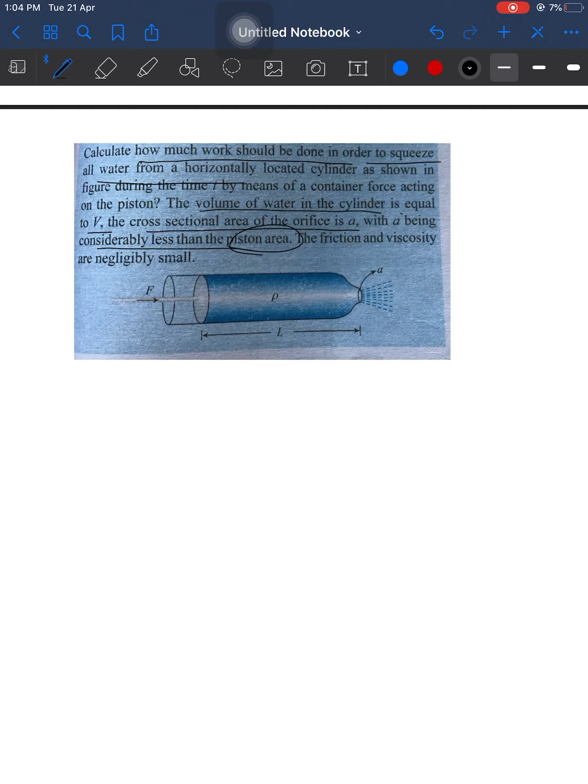First, volume of the water of the cylinder is equal to V. Cross sectional area of the orifice is a, with a being considerably less than the piston area, so area is small. Friction and viscosity are negligibly small.

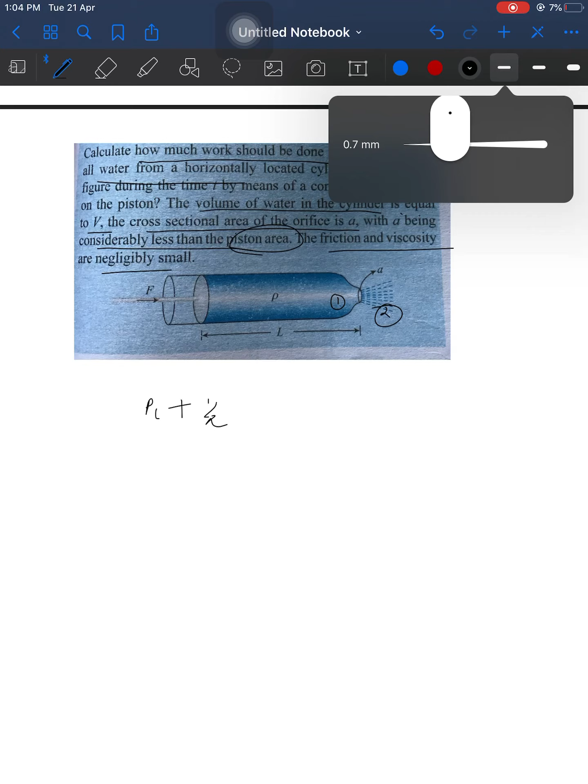Let's apply Bernoulli's equation between points 1 and 2: P1 plus half rho V1 square plus rho GH. If you see the tube is horizontal, then the H component becomes 0, because if there is an inclination, height changes are there and you have to consider H. If the object is horizontal, you don't need to consider height.

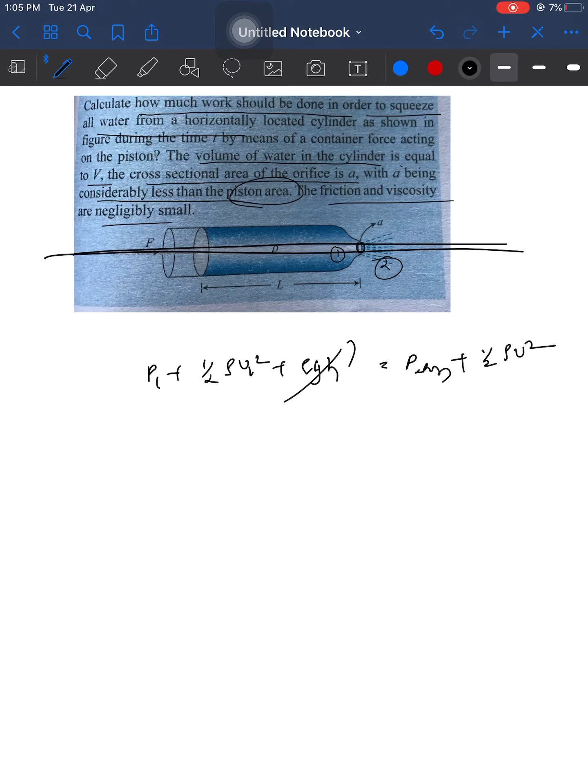P1 is equal to P2. P2 is equal to P atmosphere plus half rho V square plus rho GH, which goes to 0. Initially the orifice is small - I discussed this in an earlier video - if the orifice is small, the velocity becomes 0 inside the tube, so V is equal to 0.

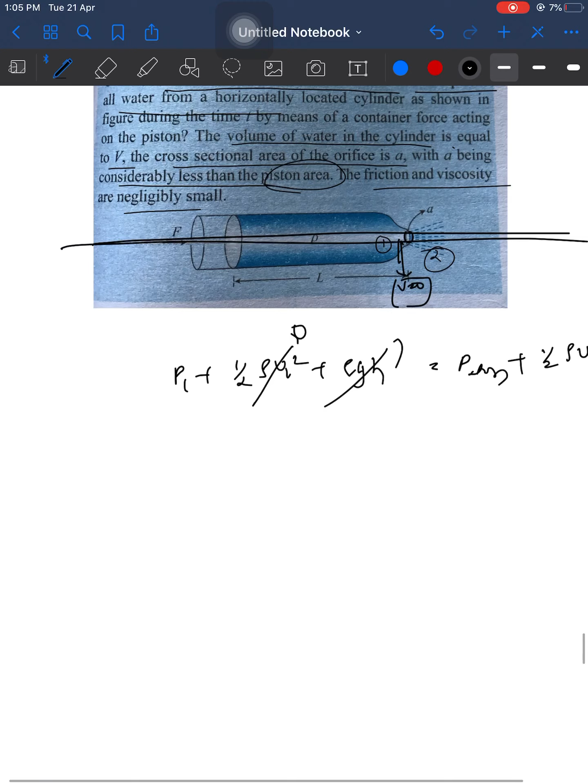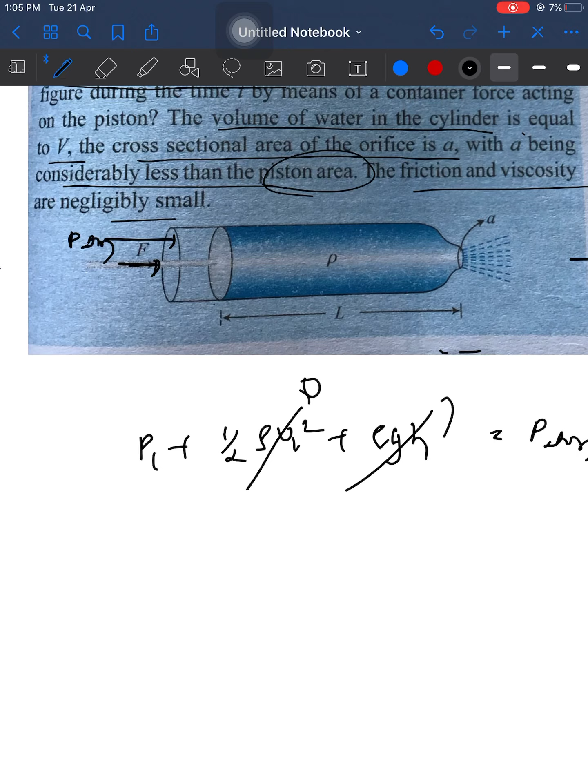How to get P1? To get P1, we consider what forces are acting here: atmospheric pressure plus this applied force. How do we convert force to pressure?

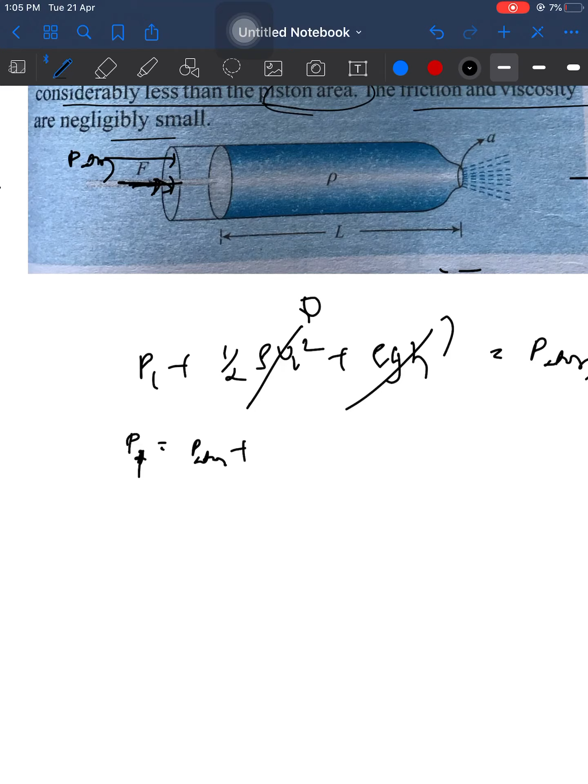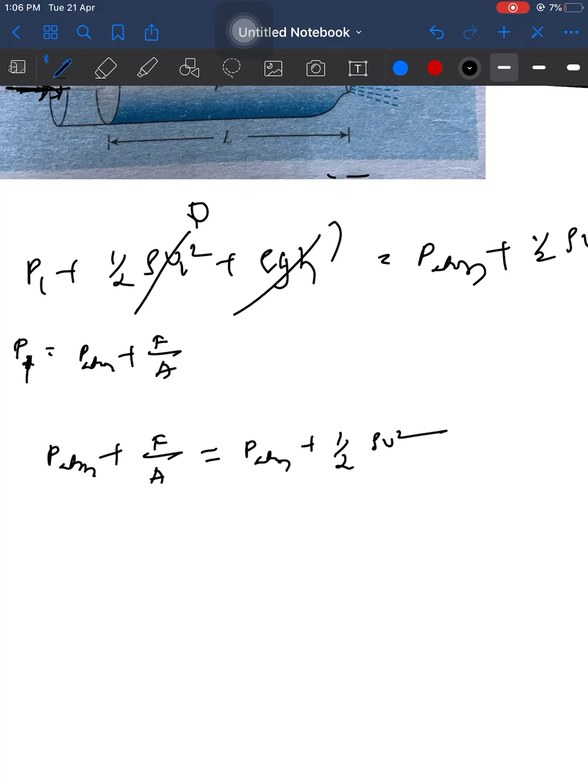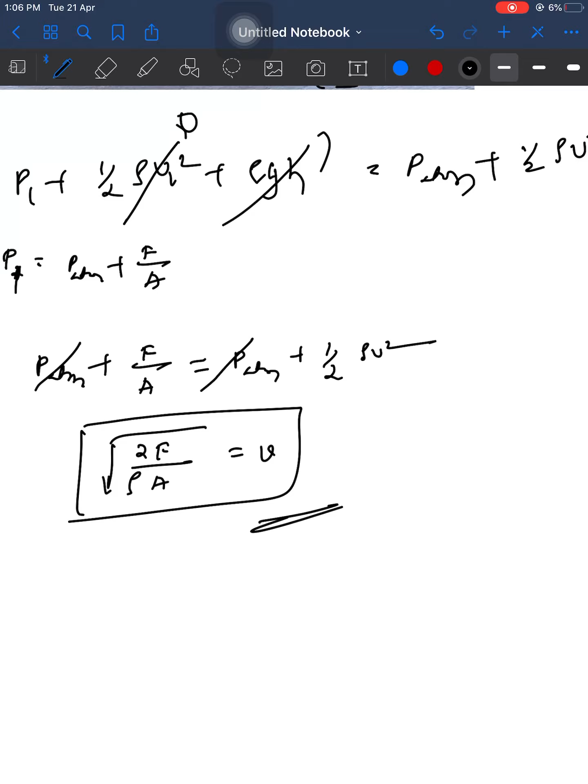So P atmosphere at point 2 is equal to P at point 1, which is P atmosphere plus force by area. So P atmosphere plus force by area equals P atmosphere plus half rho V square. Atmosphere pressure gets cancelled, and velocity is equal to square root of 2F by A by rho. That's the velocity - I am just calculating the velocity equations here.

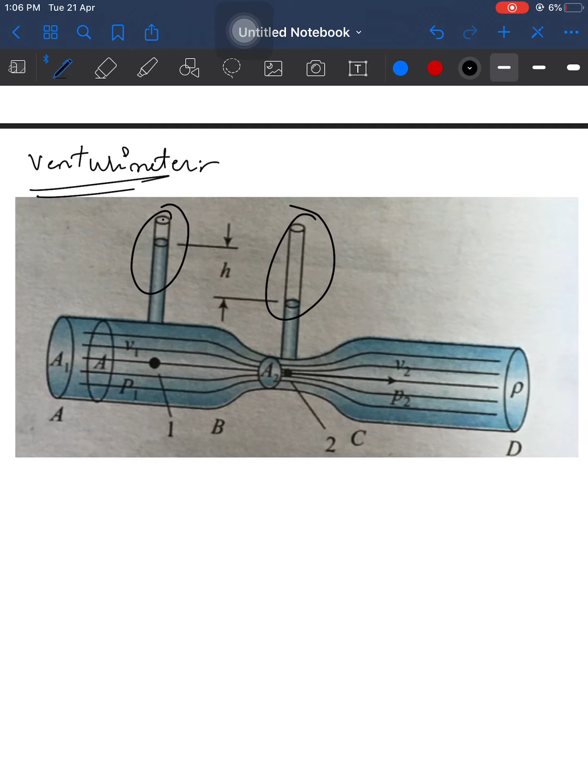Let's write the equation between points 1 and 2. Before writing this, we should write the continuity equation: A1 V1 is equal to A2 V2, and we will get the relation between V1 and V2. After this, P1 plus half rho V1 square - horizontally on the same level, so no need of writing rho GH - is equal to P2 plus half rho V2 square.

Okay, let's consider P1. How do we get the relation between P1 and P2? Listen carefully.

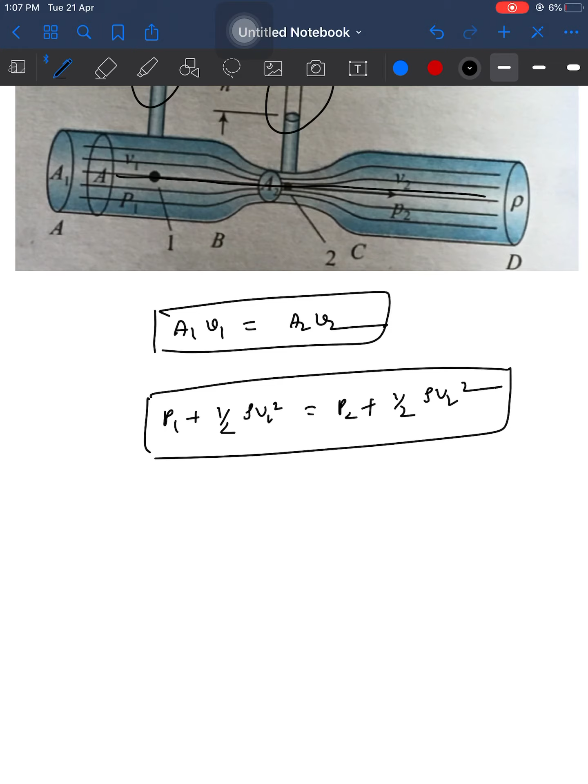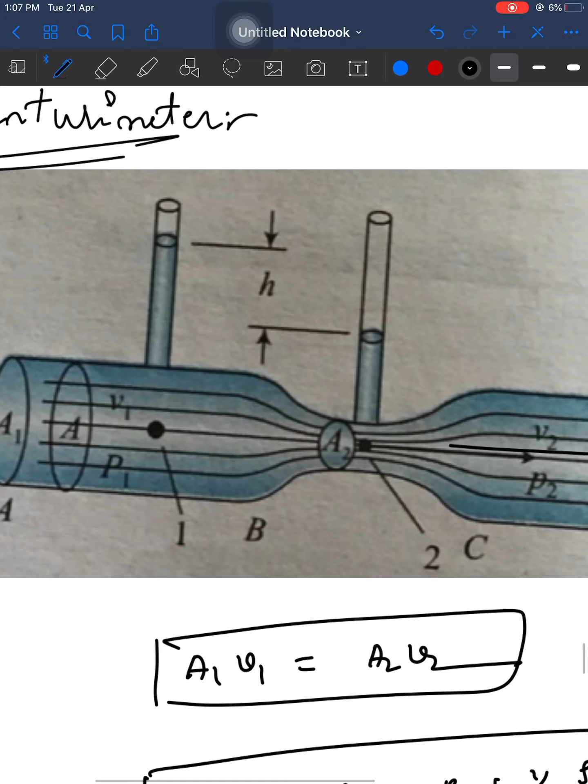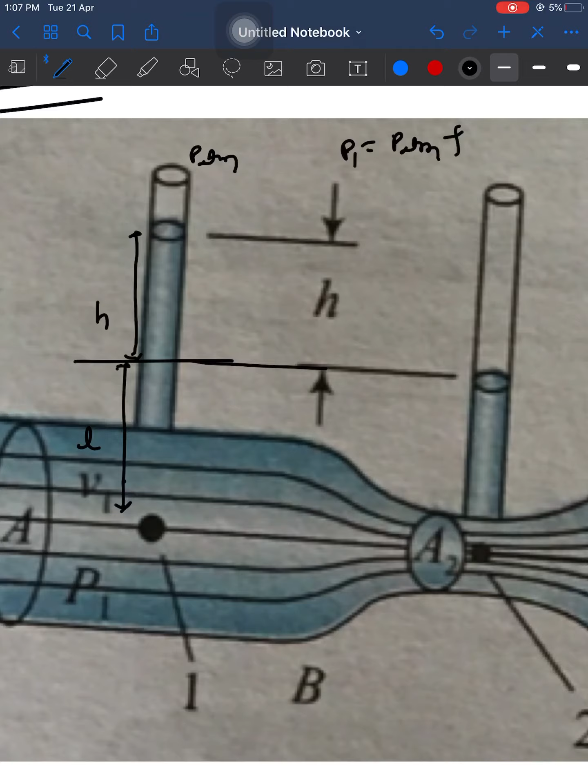This end is open to the atmosphere, so pressure here is P atmosphere. From here to here the height is H, and I am assuming from here to point 1 the length is L. So P1 is equal to P atmosphere plus rho GH plus rho GL.

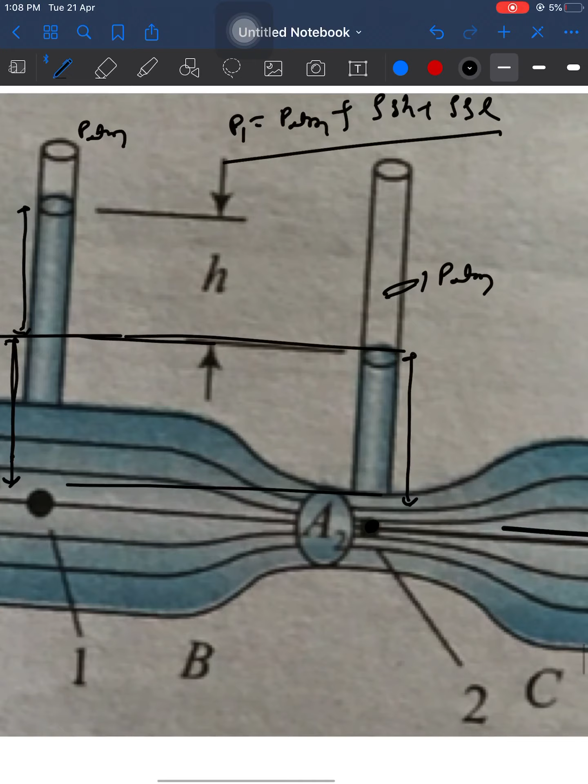Next, we will write for the second component. This end is also open, P atmosphere, and from here to here the height is L, so both are at the same level. So P2 is equal to P atmosphere plus rho GL.

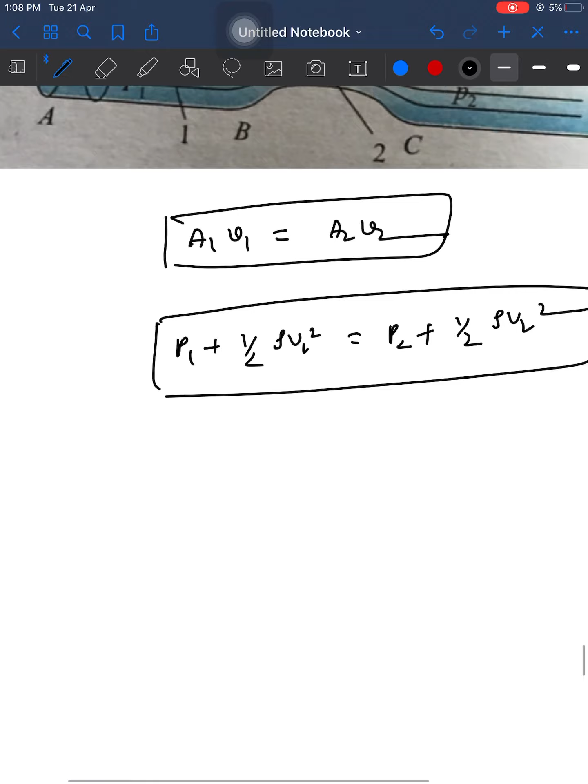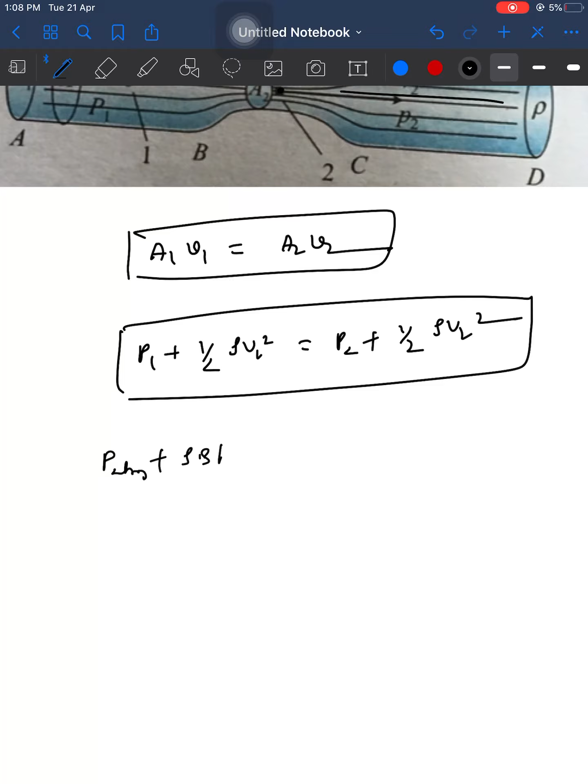Let's substitute these values in the expression. P1 is equal to P atmosphere plus rho GH, because it's the same liquid, plus rho GL plus half rho V1 square. This equals P2, which is P atmosphere plus rho GL plus half rho V2 square.

Rho GL gets cancelled, P atmosphere gets cancelled, and rho GH - with rho cancelled everywhere - leaves G into H equal to V2 square minus V1 square, divided by 2.

We also have the relation between V1 and V2. Substitute the V2 and V1 relation to get V1 and V2 individually.

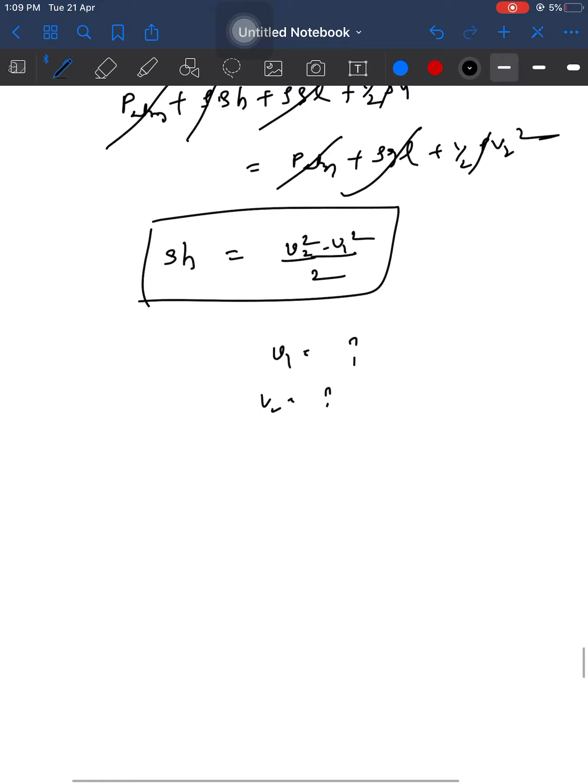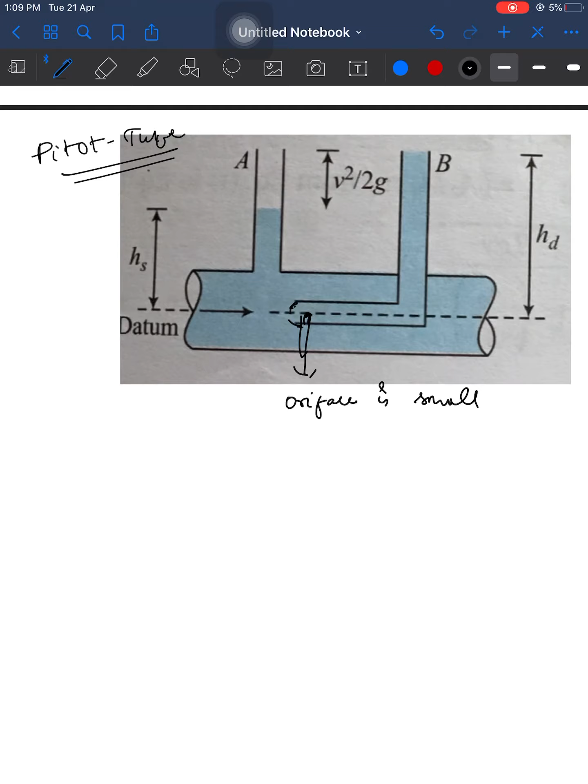So velocity inside the pitot tube is equal to 0. Remember, velocity inside the pitot tube is equal to 0. Let's apply the equation for these 2 points, A and B. Two positions we can apply.

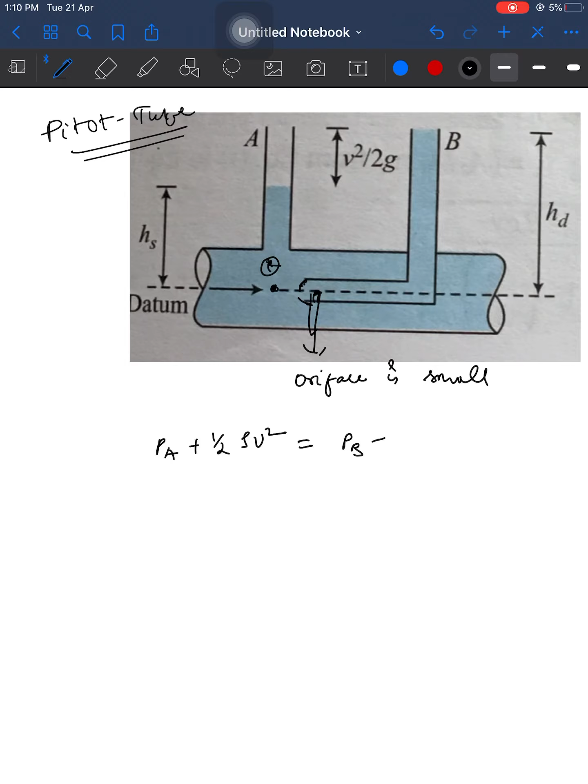If you apply PA plus half rho V square is equal to PB plus half rho into velocity 0. Both are at the same horizontal level, so H is equal to 0. PA is equal to, so how to get PA? As P atmosphere, and from here to here assume L. So PA is equal to P atmosphere plus rho GL.

There are many shortcuts to tell, but I don't depend much on shortcuts, because if you understand the concept it will be clear. Rho GL. Sir, why assume L? We can write directly the difference in height. You can do it, but I don't teach it that way.

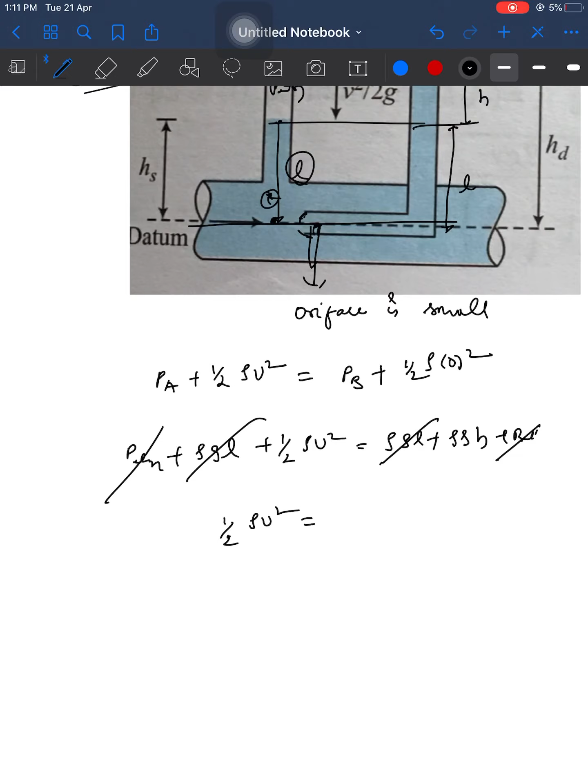Rho GL plus half rho V square is equal to PB. What is PB? So there is a height from L, say it is at a height H. It is equal to rho G into L plus rho G into H, plus 0, and rho GL gets cancelled. So P atmosphere also gets cancelled. Half rho V square is equal to rho GH. Rho also gets cancelled. H is equal to V square by 2G.

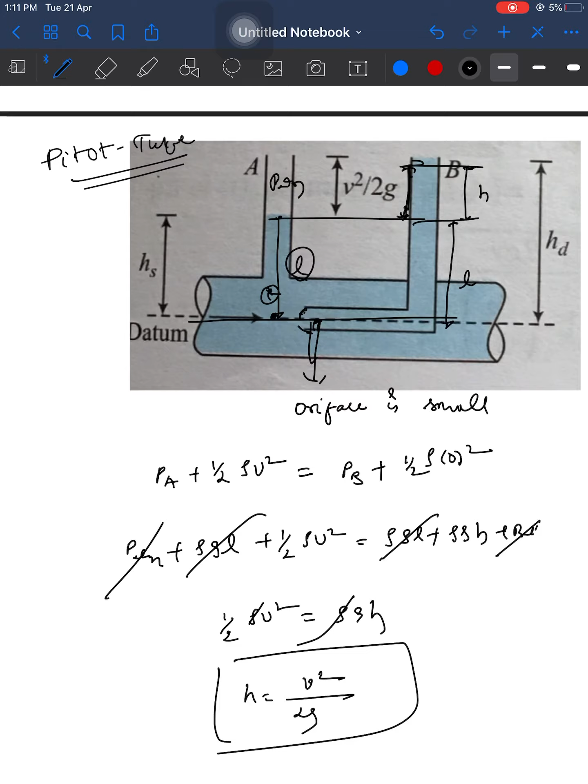So this is the height difference which can be asked. Basically only 2 to 3 equations we have to understand: first, continuity equation A1 V1 is equal to A2 V2, Bernoulli's equation, and pressure equation, and all the questions are the same. Similarly, you can try this, this is A, this is orifice, so this is pitot tube.

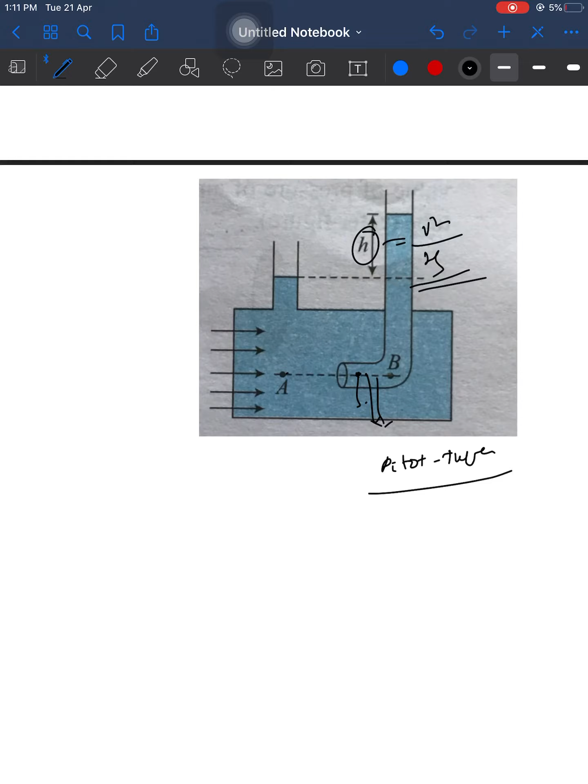If this is a pitot tube, orifice is very small, velocity becomes 0, and inside the velocity becomes 0, you can get H value V square by 2G, you will get anyhow. Okay, and you can solve this. And this is also, you can try this one.

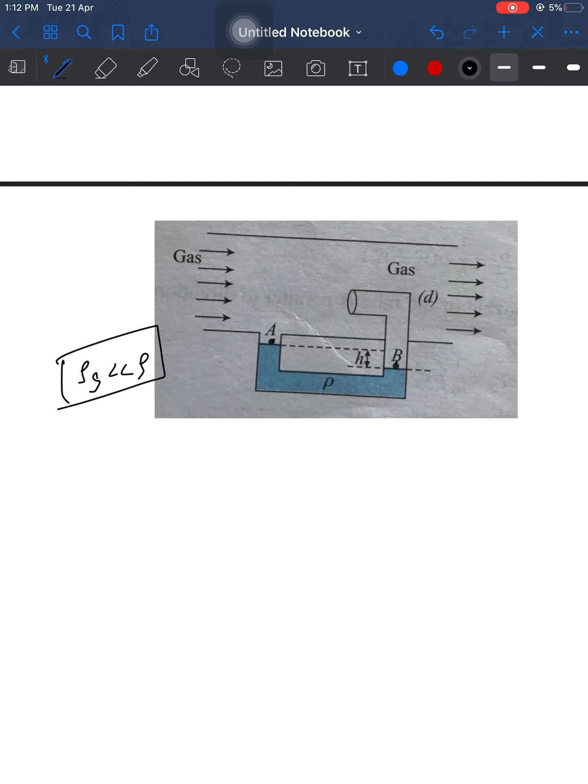Assume the density of gas is very small compared to density rho. Density of gas is very small, compare it with A and B. So I will do it. If you write the equation A, and so these 2 lines 1 and 2...

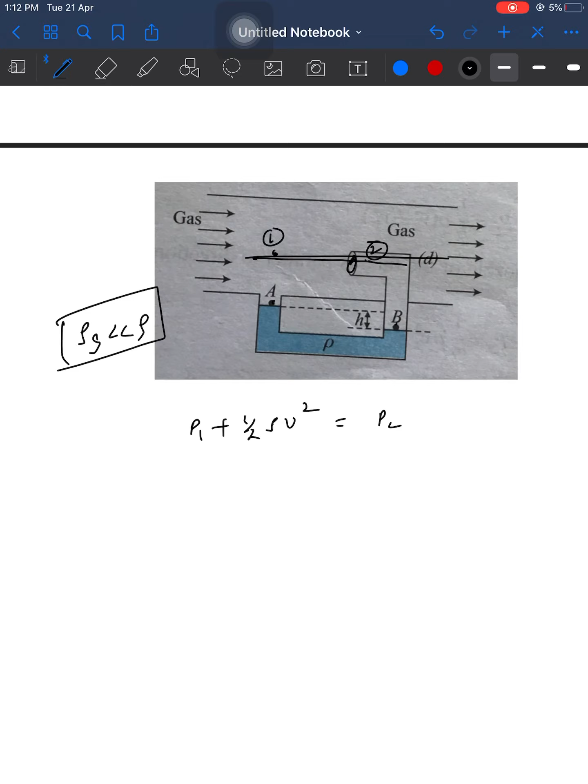If you write P1 plus half rho V square is equal to P2 plus, their velocity is 0. This is a pitot tube, velocity is equal to 0. And how to get P1? So listen carefully. P1, I am writing equations, up to the same height H.

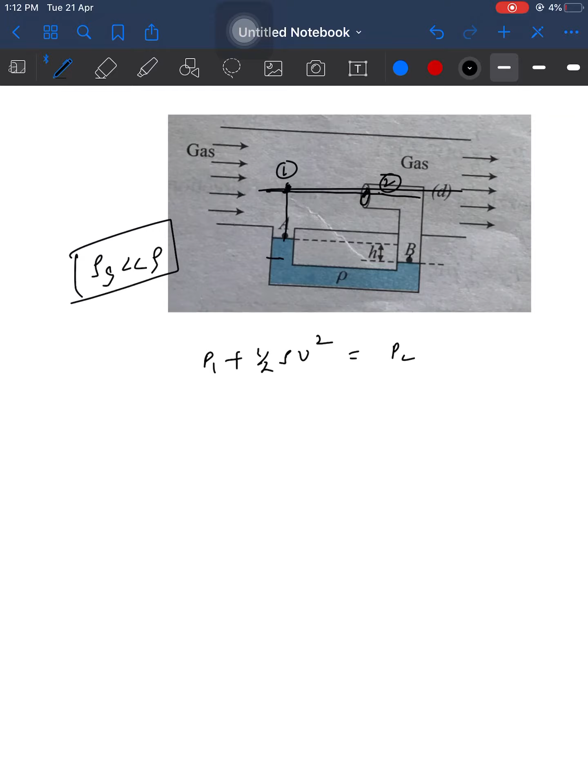See here carefully, these 2 points X and Y have the same pressure. P1 plus density of gas from here to here is say L, and from here to here also it will be L. P1...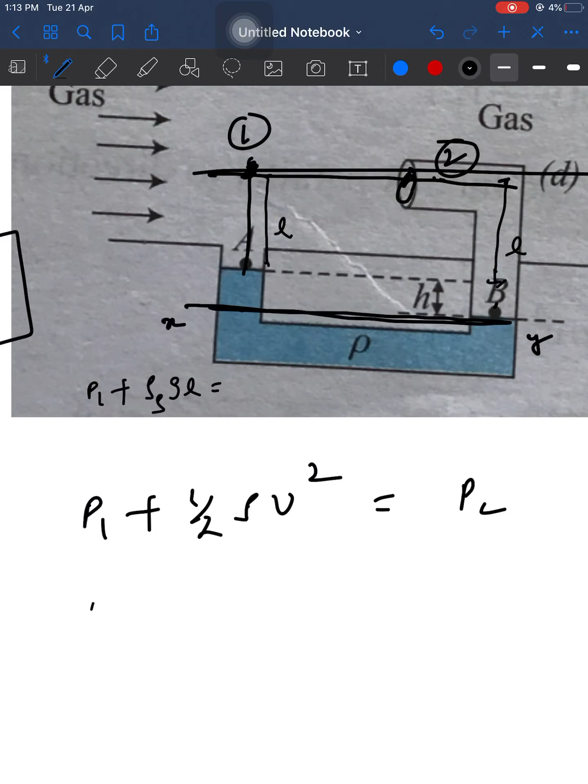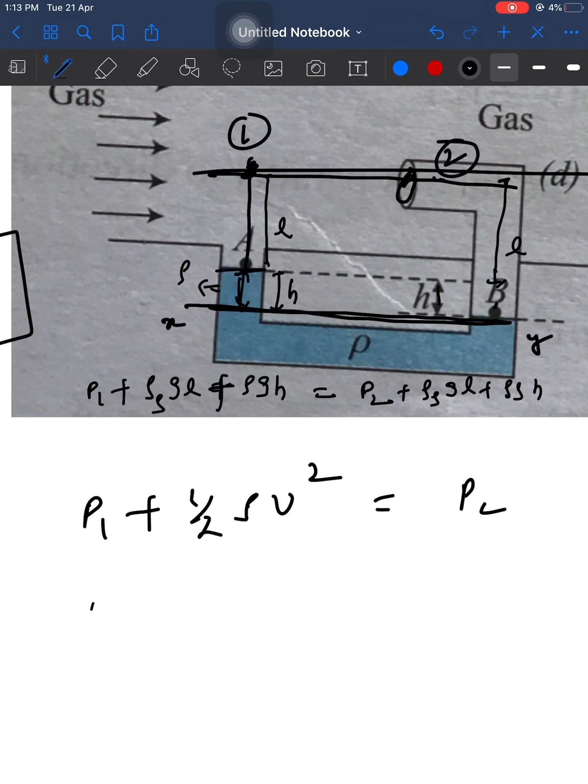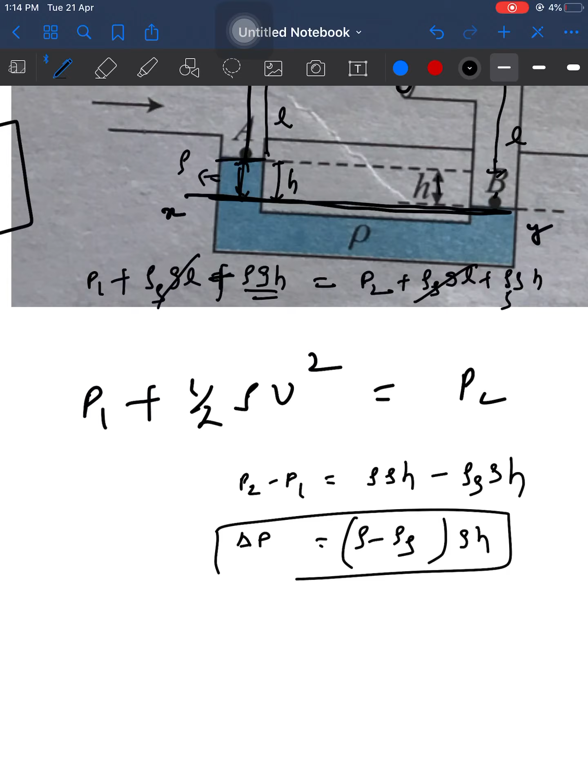So rho GL gets cancelled, and P1 minus P2 is equal to... sorry, P2 minus P1 is equal to rho GH minus rho of gas into G into H. So if we substitute rho minus rho of gas into H, this is P2 minus P1, delta P. If rho of gas is very small compared to rho, we can neglect it compared to the rho value.

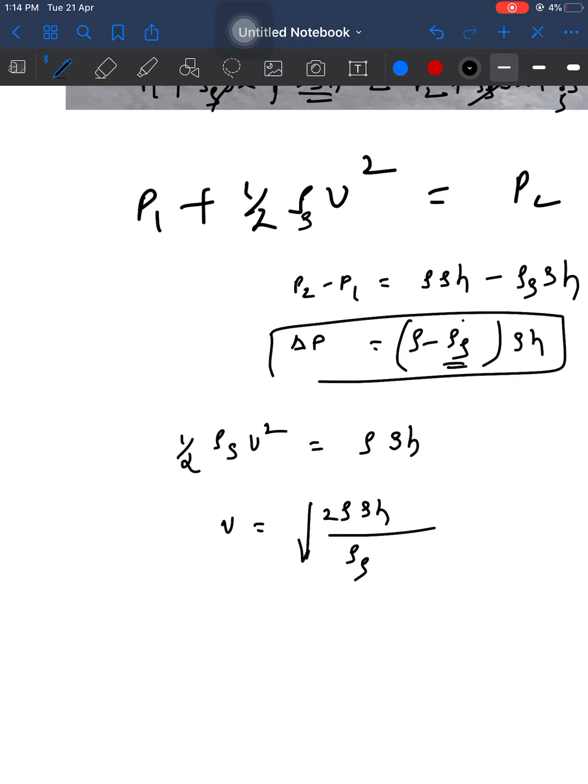P2 half rho V square is equal to... you can write it as P2 minus P1, rho GH. Rho gets cancelled. Wait, this is the density of gas, rho G. I'm sorry, made a blunder. P2 minus P1, half rho of gas into V square is equal to rho into G into H. V is equal to square root of rho GH by rho of gas into 2. This is how we'll get the velocity.

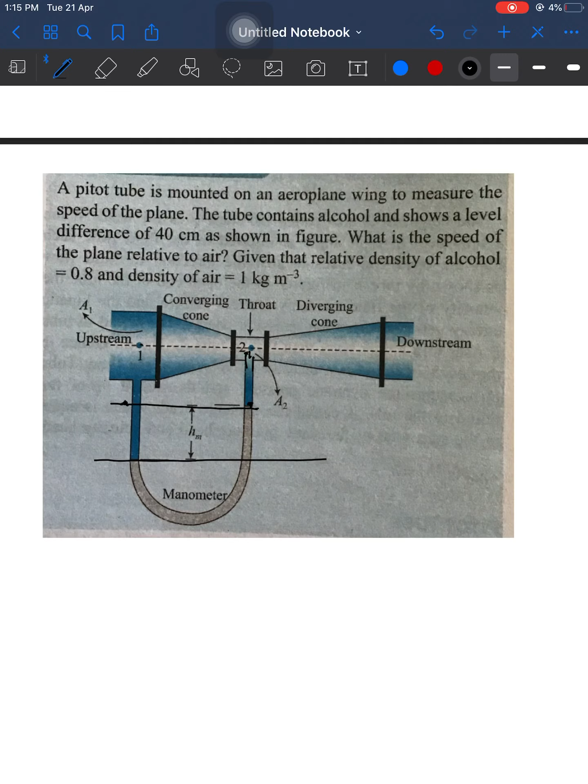So similarly we can solve any number of questions. Assume and solve this question also. Heights, this is the height, there P1, get the pressure at this point and try to solve this equation. This is a small orifice, this is a pitot tube. When I give a pitot tube, it is mentioned here that velocity at second point is equal to 0. Based on that, you solve this, pause the video and solve this question.

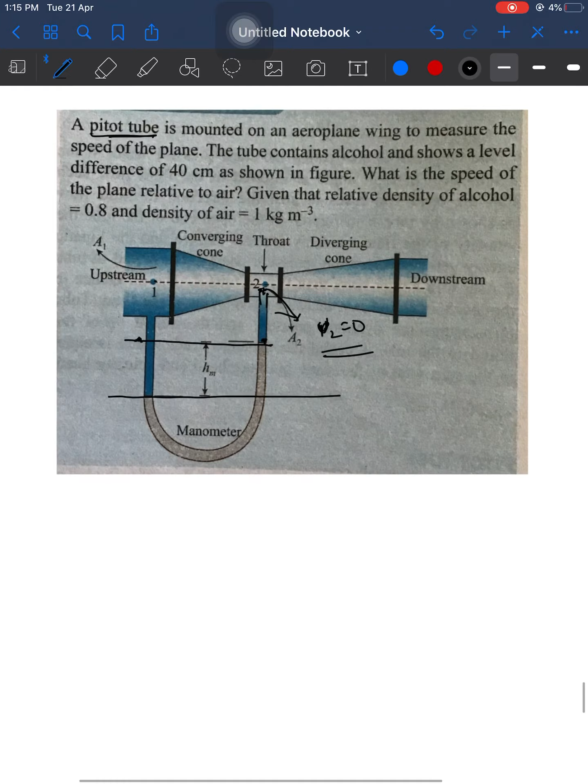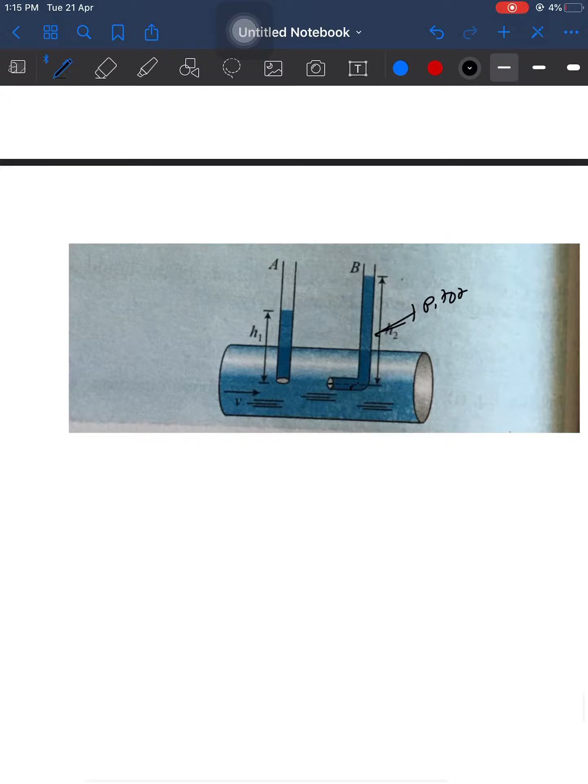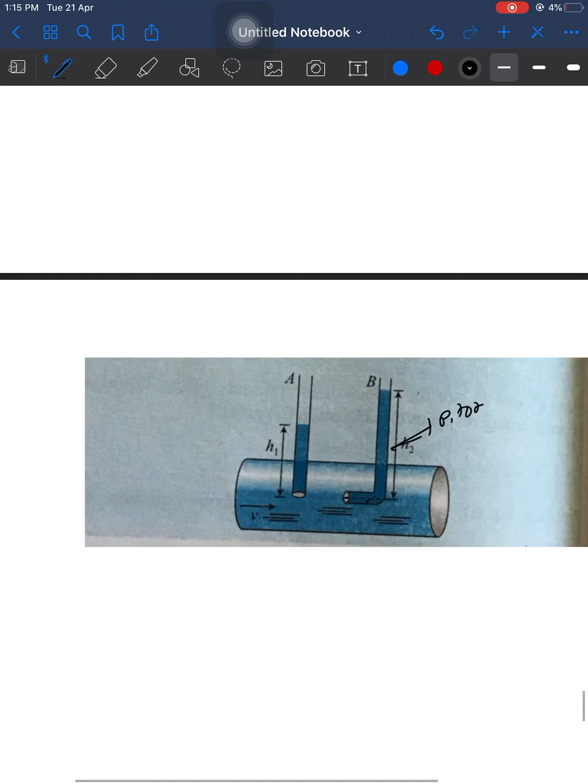And you can similarly solve this question also. This is like a pitot tube, this is also a pitot tube, and the velocity inside is equal to 0. You can get the H2 minus H1 value, and that's all about Bernoulli's equation and methods to solve. It's direct and easy. Thank you.